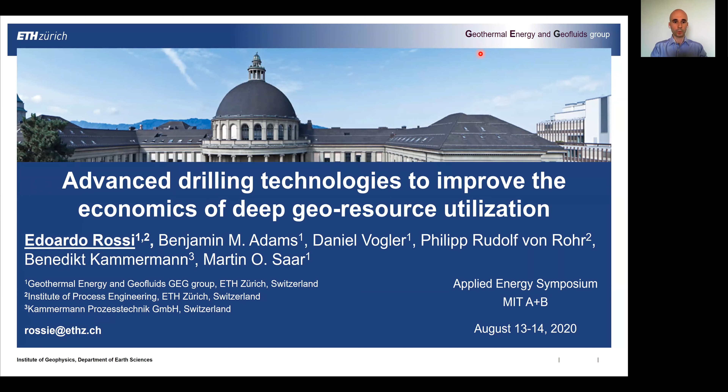Hello and welcome everyone. I'm Edoardo Rossi, and in this presentation I'm going to show you our work on two advanced drilling technologies to improve the economics of deep geo-resources.

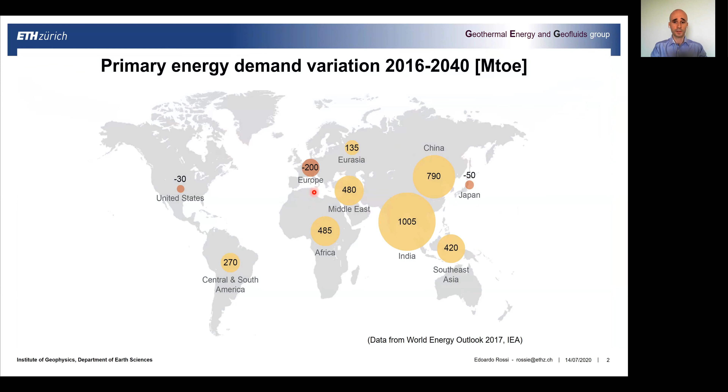Let's start from the background of this research. Looking at the primary energy demand variation in the next 20 years, we can see data from the International Energy Agency showing how, in some developing areas and due to increased world population, there will be an important increase in energy demand over the next 20 years.

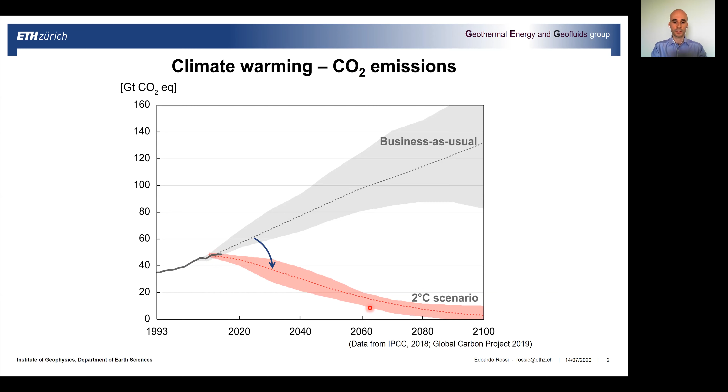Also, a current concern is about climate warming. Looking at CO2 emissions, we can see the 2°C scenario from IPCC. Therefore, if we want to follow this 2°C scenario, we need to decrease our CO2 emissions in the atmosphere and go towards a zero value by 2100.

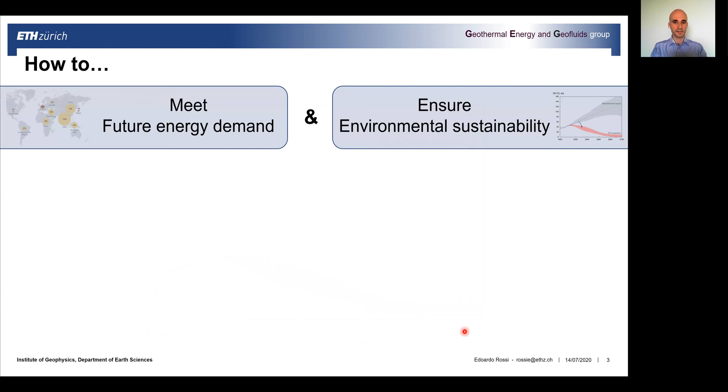Therefore, if we want to combine and couple these two issues, we understand that we need to find a solution that can increase our future energy supply and at the same time ensure environmental sustainability. Many countries around the world are proposing and applying energy transition strategies, looking at producing this increased energy generation using renewable energy sources.

Looking at conventional renewable energy sources such as wind, hydropower, and solar energy, we know there is a huge problem regarding their location and temporal dependency. We cannot produce from these energy sources all around the world, and they also show short to long-term temporal dependency.

On the other hand, deep geothermal energy, which means using the huge amount of heat stored in the underground of our planet to produce electricity, could provide an interesting solution to increase our future energy supply while also being environmentally friendly.

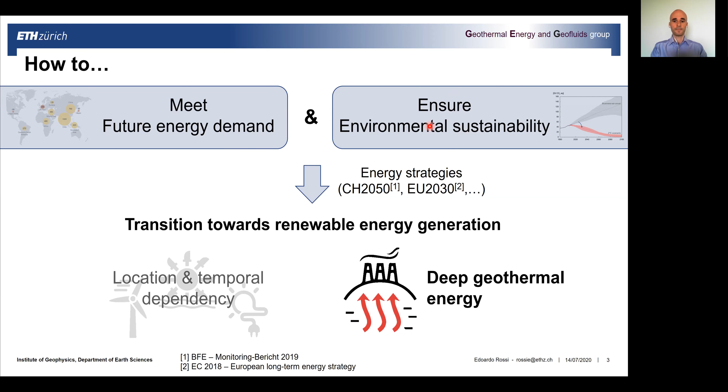One of the most interesting systems using deep geothermal energy is enhanced geothermal systems, or EGS. This system wants to use the heat found at depths larger than 3 kilometers, generally in low permeability basement rocks such as granite, circulating a fluid through a hydraulically stimulated or fractured network to extract this heat and, at the surface, produce electricity and/or heat.

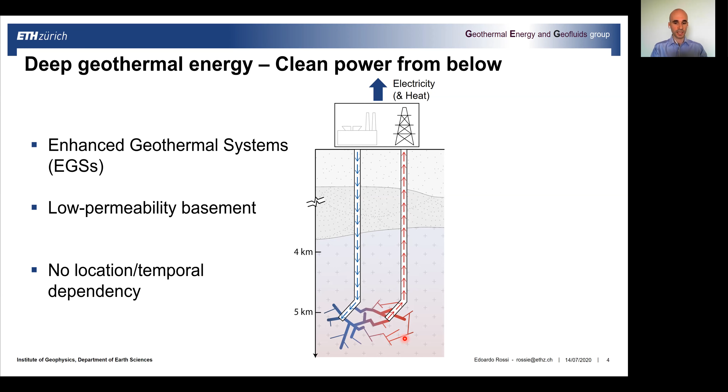Therefore, these systems show no location dependency. As soon as we can construct these deep wells, we can have these systems everywhere in the world, and there is also no temporal dependency. This system can provide baseload and dispatchable, on-demand power.

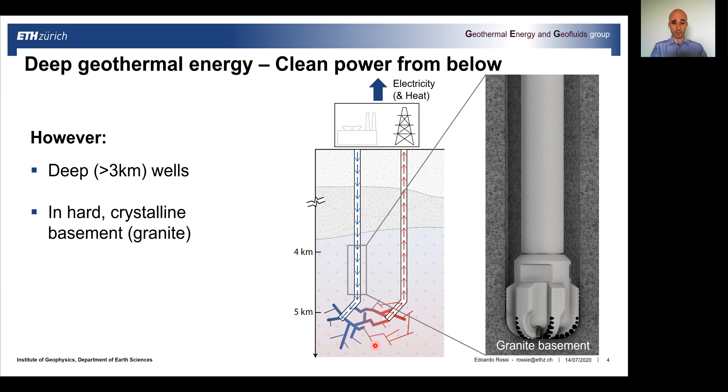However, one of the main challenges of deep geothermal energy is that we need to drill these wells very deeply, deeper than 3 kilometers, and they're generally found in crystalline basement rocks such as granite. This is a huge problem for conventional state-of-the-art mechanical drilling methods because they show poor drilling performance in these rocks.

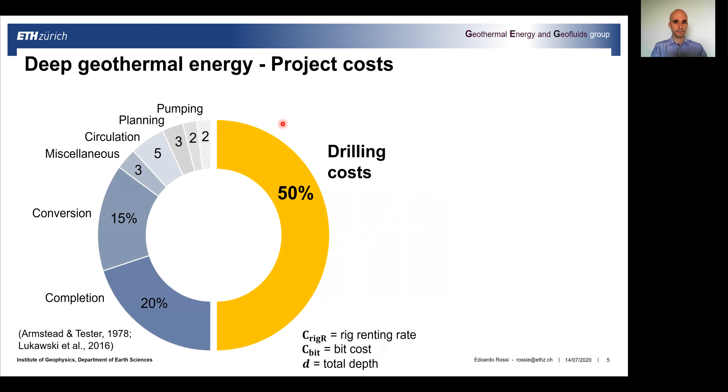If you look at the project cost for a deep geothermal energy project, we can see that drilling costs account for at least 50% of the overall project costs. Looking at a simplified formulation for drilling costs, we can see that two main parameters are the time to drill and the time to trip.

Time to drill is inversely proportional to the drilling speed, the rate of penetration, ROP. The faster we can drill, the smaller the time to drill, and therefore we can decrease the drilling costs.

At the same time, the wearing of the bit also matters: the smaller the wearing, the lower the time to trip, and therefore the drilling cost will be decreased.

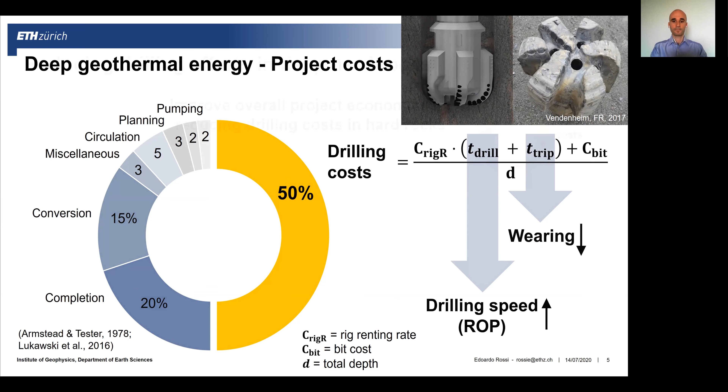Therefore, we understand that we need to find a drilling solution that can provide faster penetration and lower wearing of the bit, and therefore improve the economical viability of geothermal energy. Many researchers and research groups around the world are trying to develop and propose new technologies to improve drilling performance in deep hard rocks.

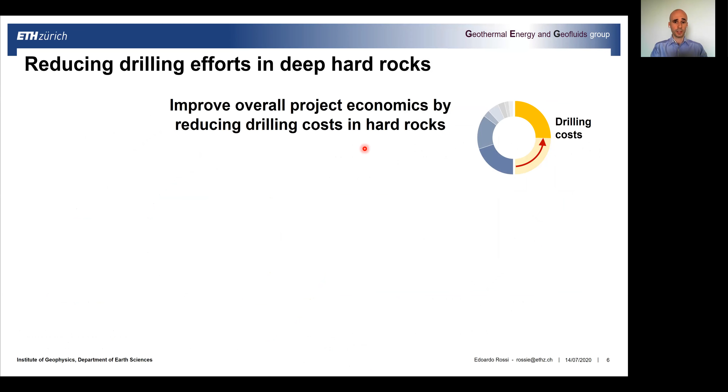At ETH Zurich, we are studying and investigating two advanced drilling technologies: combined thermomechanical drilling, CTMD, and another technology called plasma pulse geo drilling, PPGD. In the next slides, I'm going to present these two technologies, their concepts, and the numerical and experimental results that we have.

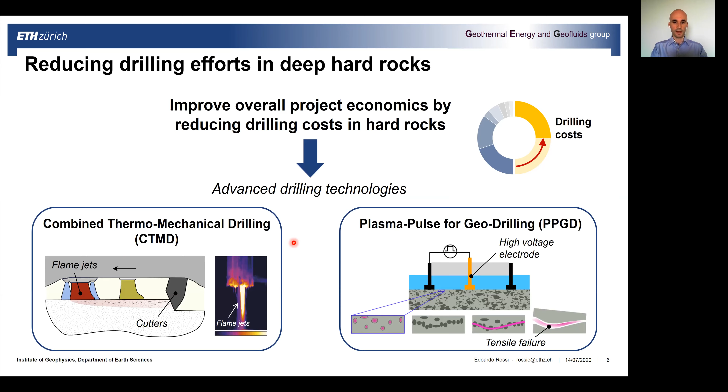Let's start with combined thermomechanical drilling. I'm going to show you the concept of this technology, as well as some results and performance parameters. The concept of combined thermomechanical drilling is that of a hybrid drilling technology, as it uses thermal assistance, done by flame jetting the material.

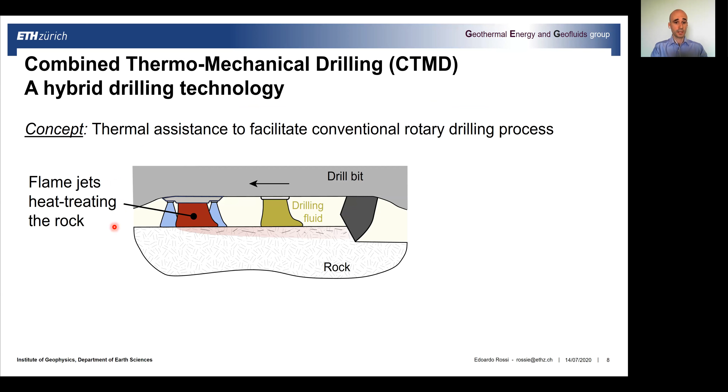These facilitate conventional rotary drilling because the flame jet induces high temperatures and high heating rates on the rock material, causing cracks in the rock. This weakened rock can be removed with reduced effort by conventional drilling cutters, enabling faster penetration and reduced drill bit wear, which will improve the economics of deep geo-resources.

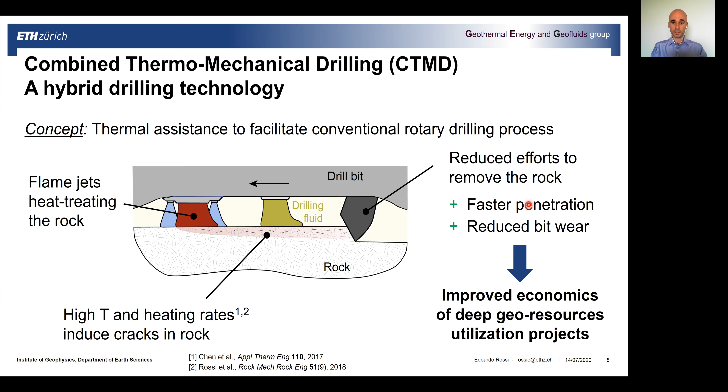After performing many experiments in the lab and developing the CTMD technology prototype, we went into the field and performed a test in collaboration with the Geothermal Center Bochum. Here you can see the drilling rig where we applied our CTMD prototype drill bit, and we performed experiments in a granite rock sample buried here, measuring many parameters to evaluate the performance of this technology.

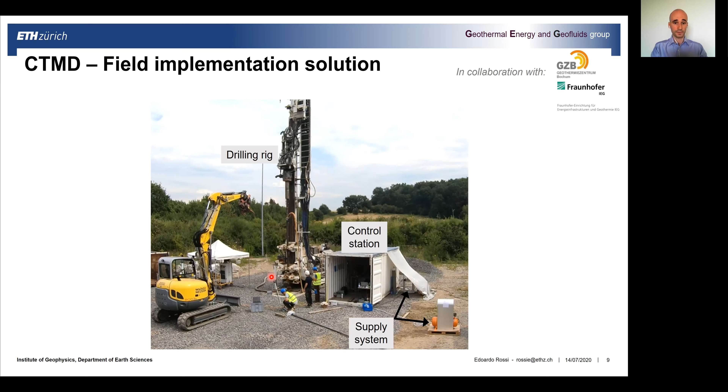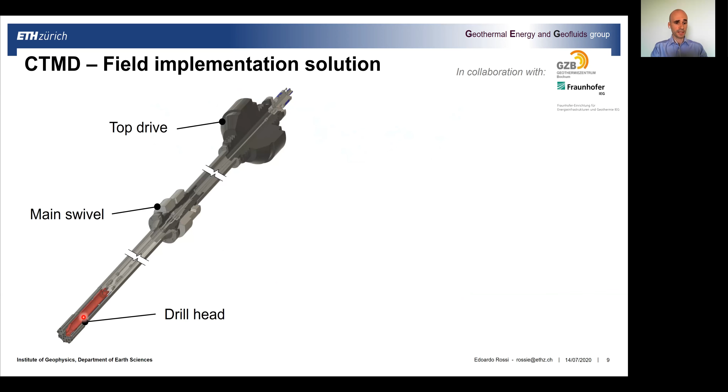This is a drawing of our prototype. The most important part is the drill head at the bottom, where in red we have the combustion chamber, used to generate the flame jet, which is conveyed down to the hybrid bit face. At the hybrid bit face are the flame jet nozzles, where the flame jet comes out through these four nozzles. This component rotates, and the conventional drill bits will remove the rock much more easily. We also have drilling fluids, so water, to transport the cuttings.

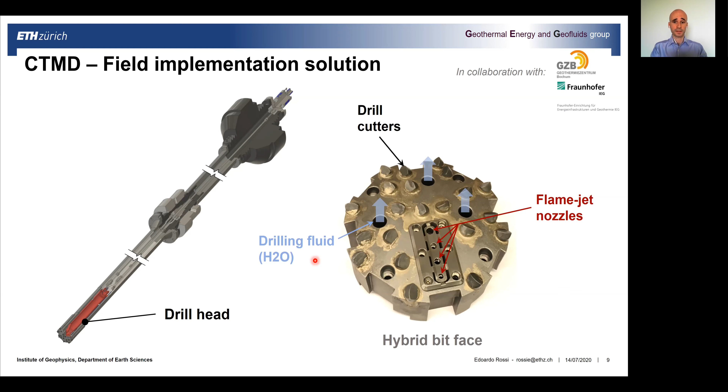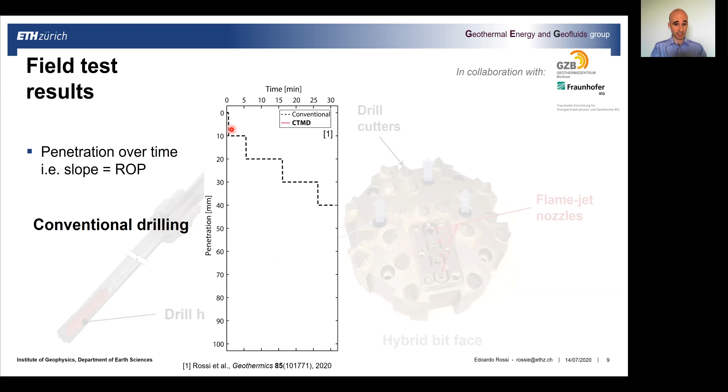Let's look at the results of this field test. We want to compare conventional drilling, only mechanical, with our technology. We switch on the flame to see what happens to penetration in the rock. Here, when we turn on the flame, we can see in red the curve for penetration using our CTMD novel technology, and we can see how penetration improves by a factor of 3 compared to conventional drilling. The slope of this curve represents the drilling speed.

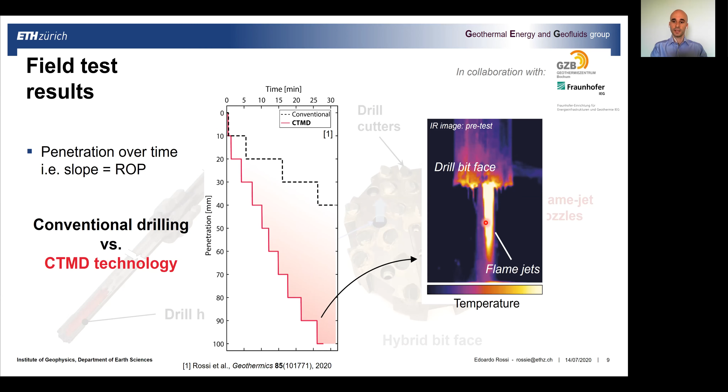From an infrared camera image, I'm showing the flame jet coming out from the drill bit before the test. Then this component is lowered and the test is performed.

Let's sum up these results from the field test and calculate some performance parameters: rate of penetration, ROP, and a measure of bit lifetime, the wearing of the bit. For rate of penetration, we compare conventional drilling with our novel CTMD technology. From the field test, we found an increase in penetration by a factor of almost 3. For specific wear, which is inversely proportional to bit lifetime, we can compare conventional drilling with our technology and see that we improve bit lifetime by a factor of 2.5 when we switch on the flame. So thermally assisted drilling can perform much better in this hard granite rock.

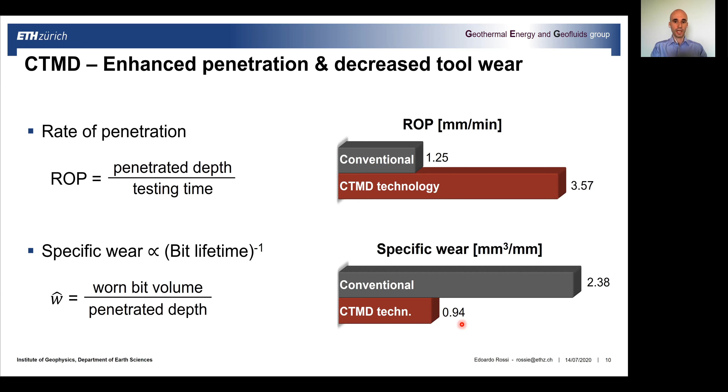Let's now move to the other technology: plasma pulse for geodrilling, PPGD. This is a completely different technology. I'm going to show you the concept behind it and also some first results.

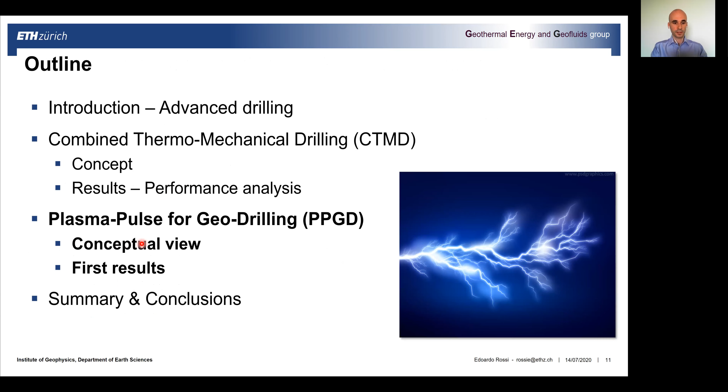The concept of PPGD is based on having electric discharge within the rock, which breaks the rock by tensile fractures. Electrodes are placed on top of the rock surface, so there is no contact or mechanical removal, which is why it's also called a contactless approach. This means we have no tool wear whatsoever - the drilling tool will practically have no wear. It's also an energy efficient process because we break the rock by tensile fracturing, which is much more efficient compared to compressive stresses.

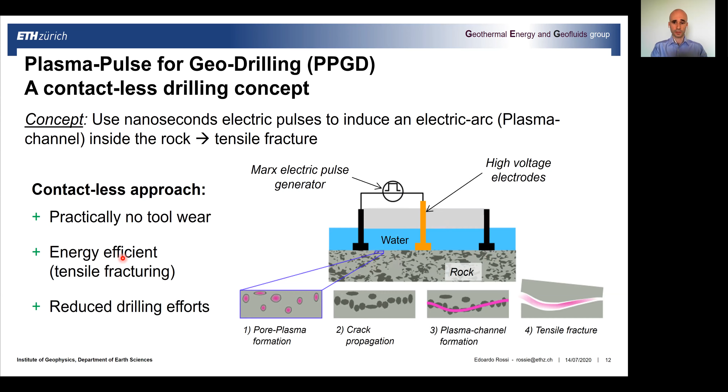And therefore we can say that we have reduced drilling efforts due to the above mentioned factors.

We now show some numerical modeling of Electro-Pulse drilling. We place a slab of rock between two electrodes and apply a potential between them. We want to study the damage mechanism during PPGD, what happens when we apply this potential in the rock, and also the influence of different parameters.

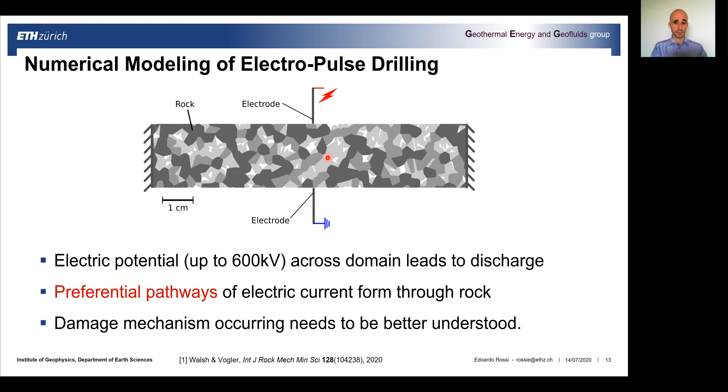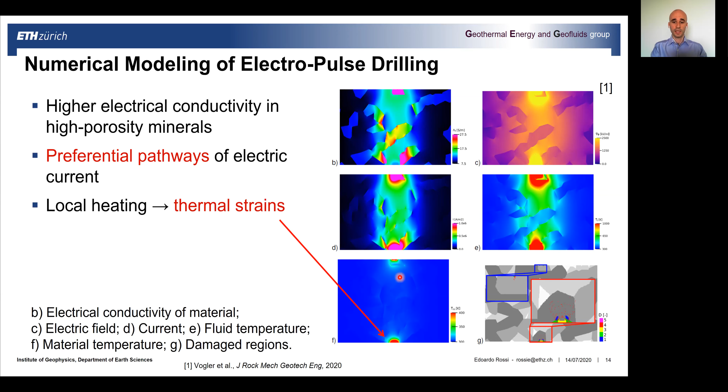The numerical results are shown in this slide. As we can see, high electrical conductivity values are shown for high porosity minerals, and this causes preferential pathways for the electric current, as you can see here. This is also responsible for localized heating in the rock, as you can see in the temperature field, and therefore thermal strains are induced. These thermal strains are localized, and the damage is formed, as you can see in this figure.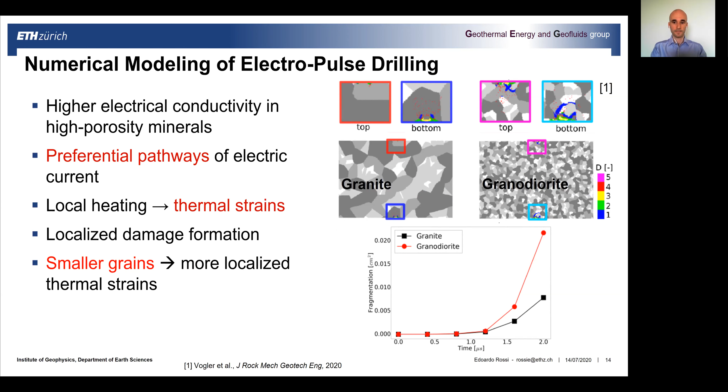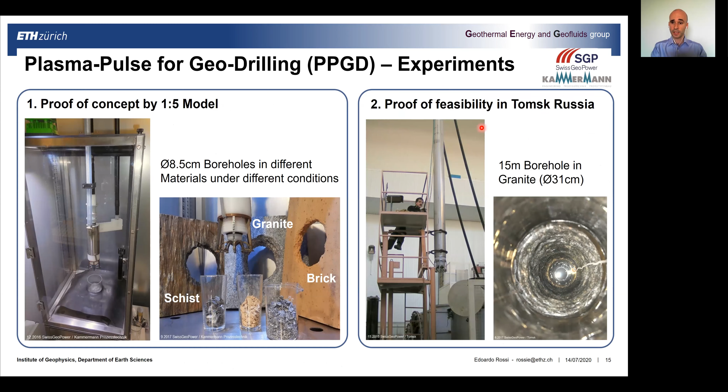After this, we want to use this numerical model to also study different reservoir conditions for PPGD. Experiments have also been carried out - this is the proof of concept of the PPGD drill bit model in the lab, where different materials have been drilled using this technology: schist, granite, and brick. Also, a proof of feasibility of this PPGD technology has been carried out in Russia, and under realistic conditions a 15-meter borehole in granite has been drilled.

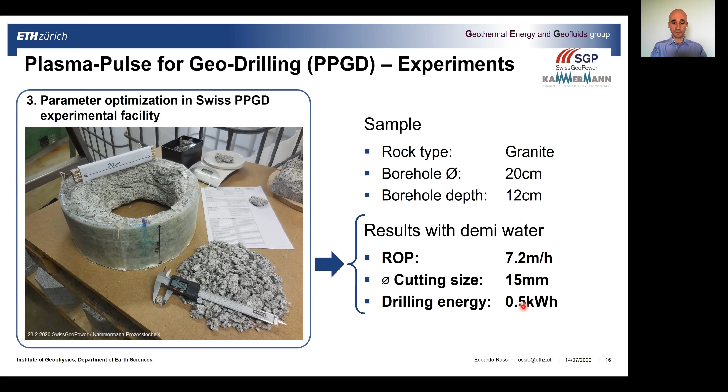Now let's sum up what I just showed you, and conclude on the two drilling methods.

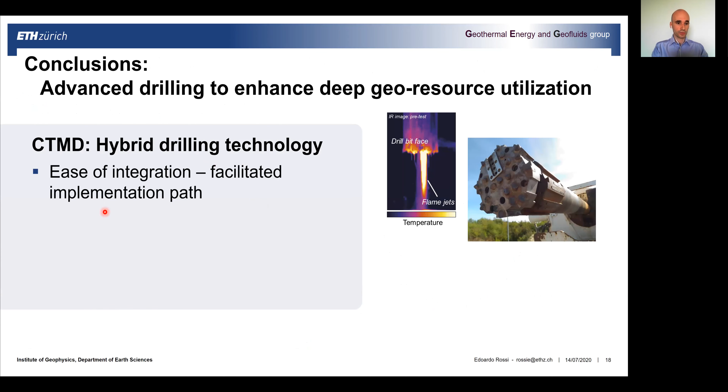For CTMD, this is a hybrid drilling technology, meaning we are combining thermal assistance, flame jets, with conventional rotary drilling. We can envision an easier, facilitated implementation path due to the synergies with conventional drilling, and therefore we could profit from the established know-how in the drilling industry. The technology can also develop further using the know-how already out there for conventional drilling systems.

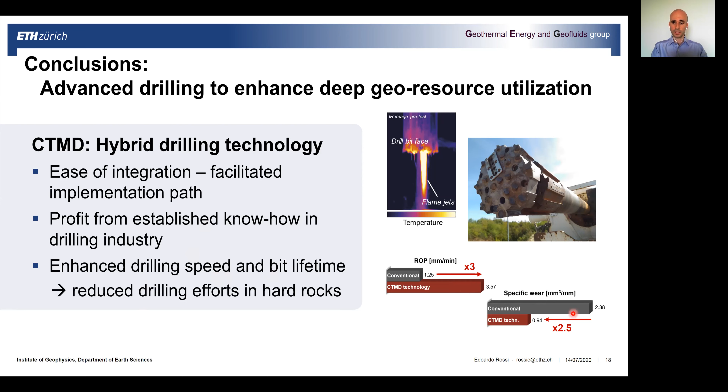As I showed, the drilling performance using CTMD is enhanced by a factor of 3 regarding drilling speed, and the bit lifetime can be improved by a factor of 2.5.

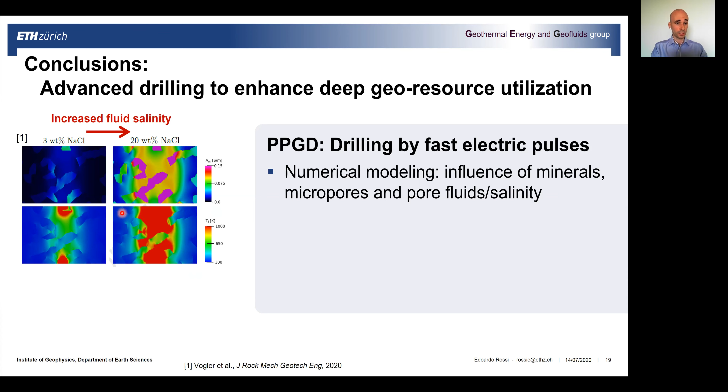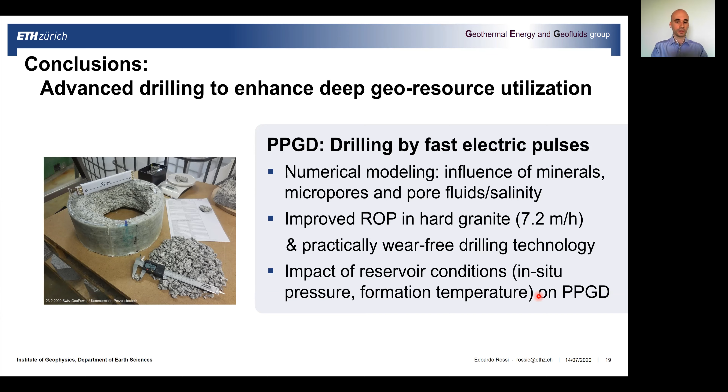The next step is to study the impact of reservoir conditions, in situ pressure and formation temperature, on the PPGD technology. This is the end of my presentation.